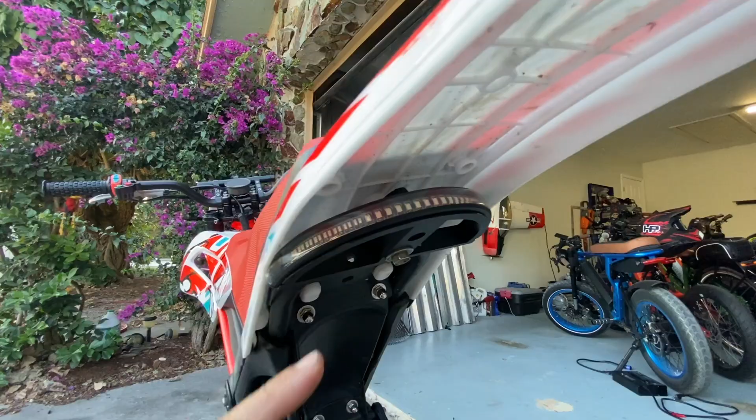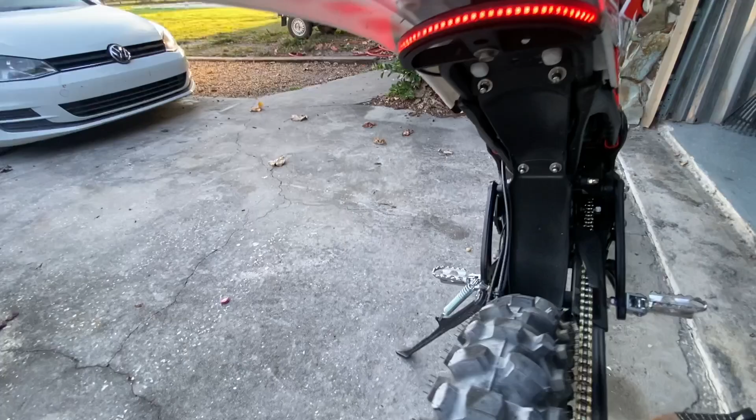So the next thing you need is obviously a tail light. On this bike we've got this cool little thing, this comes from Emx-Shop, and you can see these LED lights right here. That's all functional off of this switch that's also included in the kit. So you turn on your lights, and now we've got a tail light, really nice. And it's connected to the stock brake, so we also have a brake light.

Pretty cool. Up front we've got these great daytime running lights, as you can see, nice and bright. At night, this illuminates the entire ground. We'll do a night ride with this. Right now it's still not dark enough, but you can see these on.

And then when you hit the turn signal, they sequence, so you've got a turn signal. And that turn signal carries over to the rear as well, so you see you've got a turn signal in the rear. So we've got turn signals, we've got a tail light, we've got DRLs, we've got a headlight, and last but not least, we have a horn.

So that, all together with everything, makes this entire setup a street legal solution, so to speak. You can get on the road, you're not going to be a ghost rider, you'll be able to kind of blend in. You'll have turn signals, headlight, horn, everything you need to do what you need to do on the road. So just a cool overall kit.

So let's wait for the sun to go down and we'll take a look at it in the dark. All right, so it's getting dark, as you can see. So let's go ahead and fire up these lights and see what this looks like.

So we'll hit the light switch. Boom. And as you can see, the lights really illuminate the entire front area, the plastics and the ground right here. This creates a really nice lighting effect just with the running lights on. And then in the back, we've got the tail light, as you can see, that looks really nice.

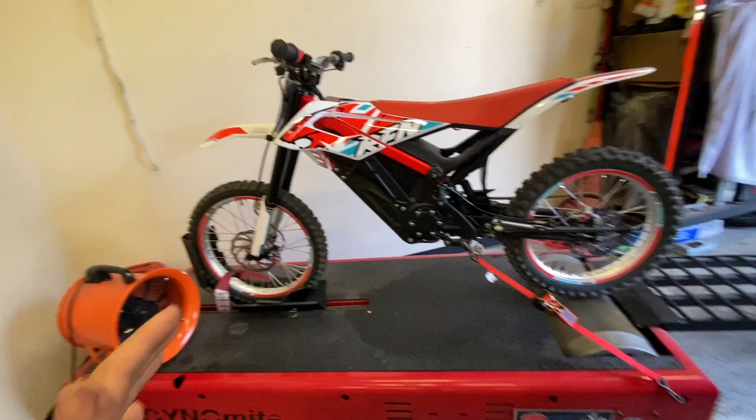All right, now we're back at the shop. We're throwing the bike on the dyno. We're gonna see what this thing does. This is gonna be our baseline power numbers. We'll test it in rocket mode, obviously, because I want to see what this thing's capable of. They claim 12 kilowatts, so I want to see close to 12 kilowatts. Let's see what this thing is able to put down, and see how it compares to a SurRon, because that's the real question I think everyone has. Does this thing actually put down the power it says it's going to put down? And we're about to find out.

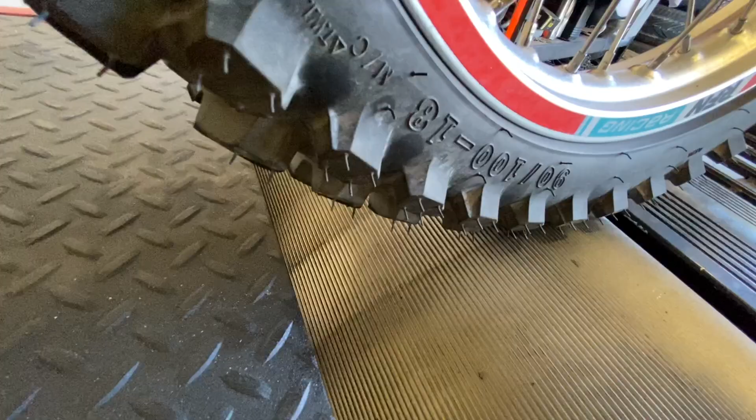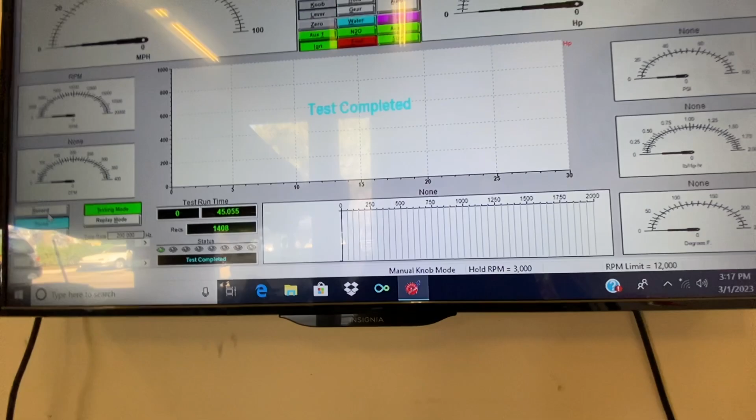So the knobby tires clearly were spinning pretty good. We're gonna tear these tires up trying to dyno it, but let's just see what we were able to capture. And remember, that was spinning, so it's not gonna get the full power to the ground. Let's take a look and see what that actually meant though.

Okay, so we were not able to get any of the power down that I was hoping. I'll make another run sitting on it, see if we can get a little more pressure on that back tire. But that run was 10 horsepower, still a lot better than a SurRon. So let's try again. This time I'm gonna sit on the back, see what happens.

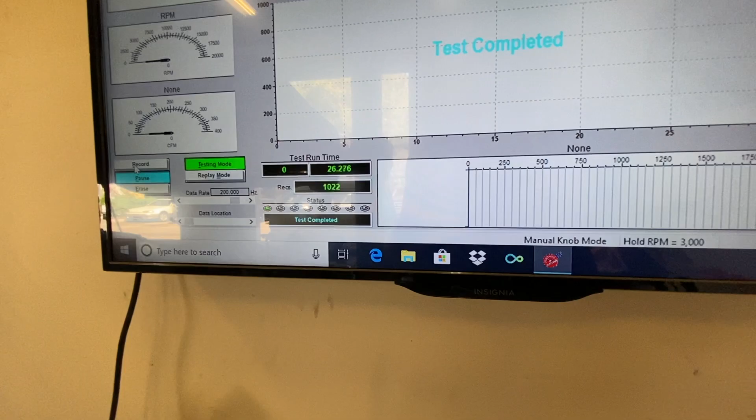All right, that was way better. That time it hooked a little better. It spun a little bit, you could hear it, but nowhere near as bad. And that gets us about the same, just more power down low. So it really didn't pick up too much down there. So 10 horsepower, that's not the 12 kilowatts I was hoping for.

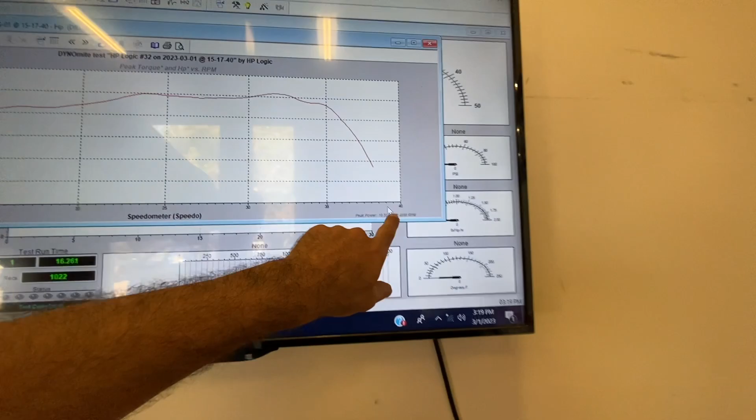So I don't know if that's a programming thing or what. I did use rocket mode, but I'm not too sure that we're getting all the power that it says it's supposed to. I know that this motor and battery and controller is capable of it, but you guys have to remember this is also a pre-production unit, not the actual production unit, so it's possible this thing isn't dialed all the way up. But that's why we're doing this, I'm testing this stuff out. Anyway, let's compare it. 10 horsepower - I'm going to pull up a SurRon and see what that compares to.

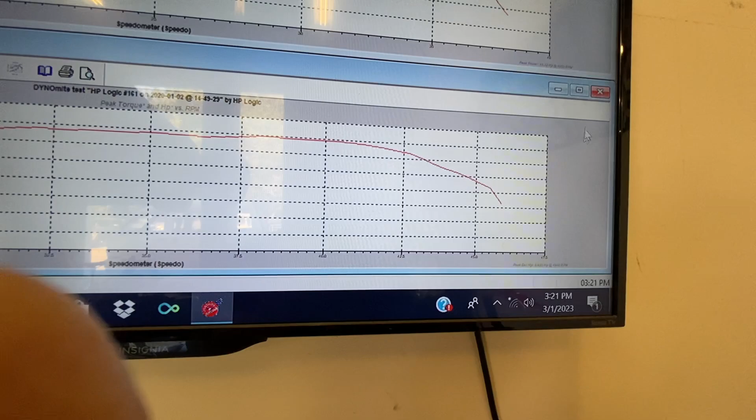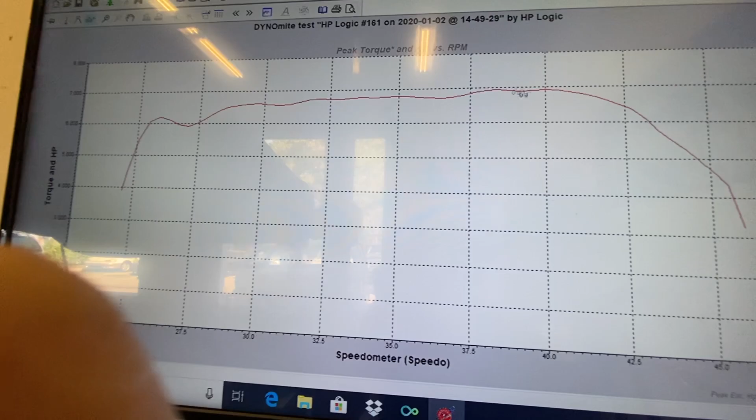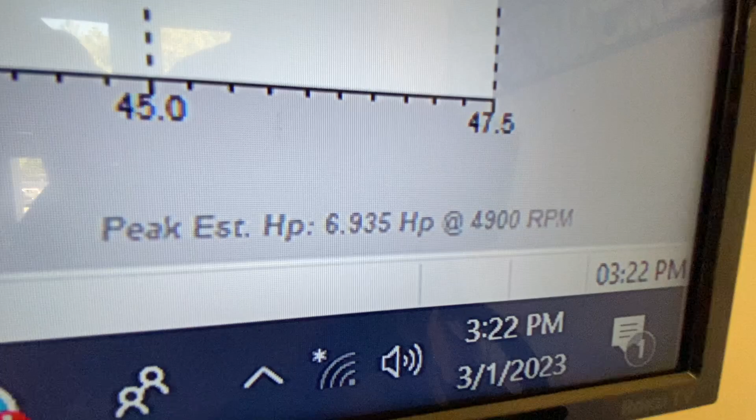Okay, so we've got the SurRon file here. Let's open this up. We can see 6.9 horsepower, falling off around 40 miles per hour. Down low, about 6.5, almost 7 horsepower until we get to the peak here. Peaks around 37, 38 miles an hour. That's where we're seeing that almost 7 horsepower. So we can call it 6.9. And then let's compare it to here.

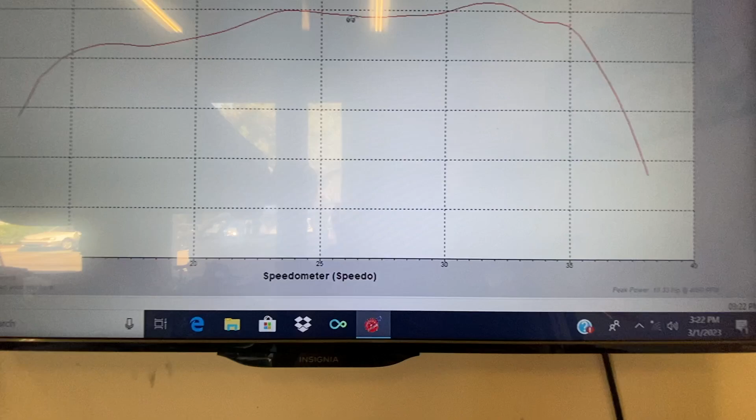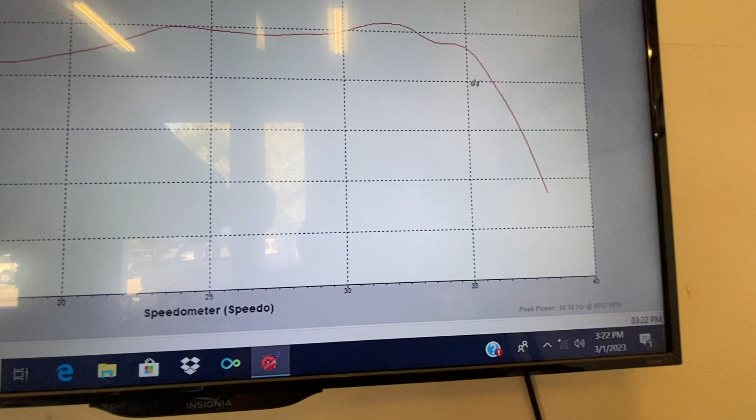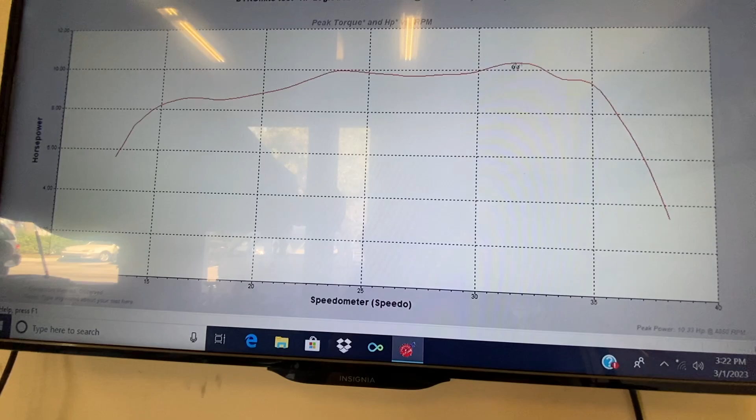And you can see we're at 10 horsepower. So more power for sure. Falling off somewhere around the same - actually this one's falling off a little earlier, and that's because it's speed limited. Again, this is a pre-production unit, so we are still working bugs out of that. But it is putting down more power - 10 horsepower, about 3.2, 3.3 horsepower more than the SurRon from the get-go. So that's promising. We'll see what that really translates to as we get into some more tuning.

I do intend to tune this up a little bit. A couple of companies have already reached out to me about building kits for them. I don't want to do that yet though, because I think this controller has the capability of putting out a lot more power. I think I'm just going to speak with the manufacturers and deal with them - this is an Apollo machine all around. So I'm gonna deal with them first, give them a chance to deliver on their promises of 12 kilowatts, and see if we can bump the speed up a little bit too.

And overall, this is going to be a great little bike to ride on the dirt, or maybe even on the street. We can get some supermoto wheels, maybe another set of wheels, we'll do some dual sport tires on them. It'll just be fun. I'm really into this bike. Really cool - Apollo RFN, badass.